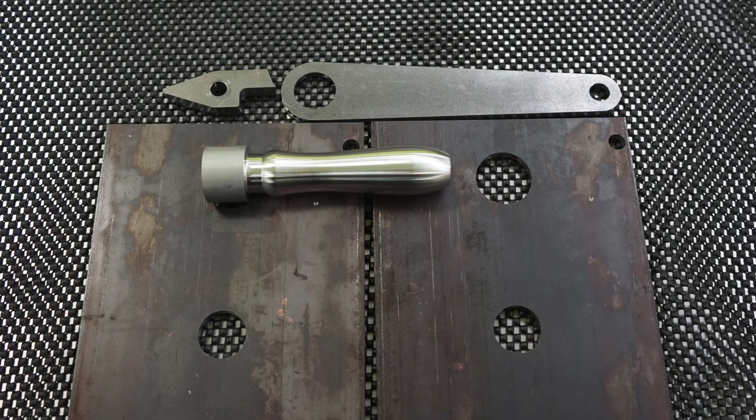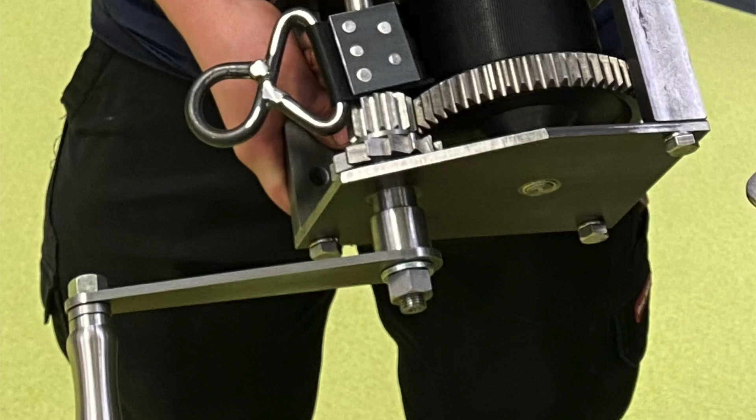So the next thing I need to do here is machine the handle, or the handle plate, I should say. Now, fixturing like this is not desirable, and I'm not telling you how to fixture your parts. This is just how I do it. Now, this is a winch. It's not calling for high tolerance parts, okay, so keep that in mind.

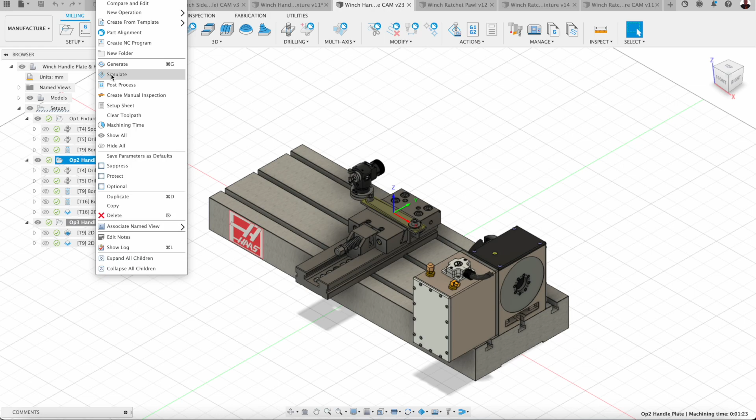So we've made a little bush down in here, and I can turn that off to show you, and that locates that, okay. We've got a fixture plate, a little bush, a couple of bolts in here. Now, if I bring it up to the CAM now to show you, if I have a look at the handle plate itself, and if I was just to simulate that and ignore the bolts, you can see here that I'm drilling that and boring that, popping over and boring that big hole.

Now, these are your critical dimensions. So in reality, the critical dimension is from this hole to that hole. However, think about what the part is. It's a handle plate for a winch. It doesn't call for high accuracy. It's not going to Mars. All right, so bolt fixturing will be fine in this instance.

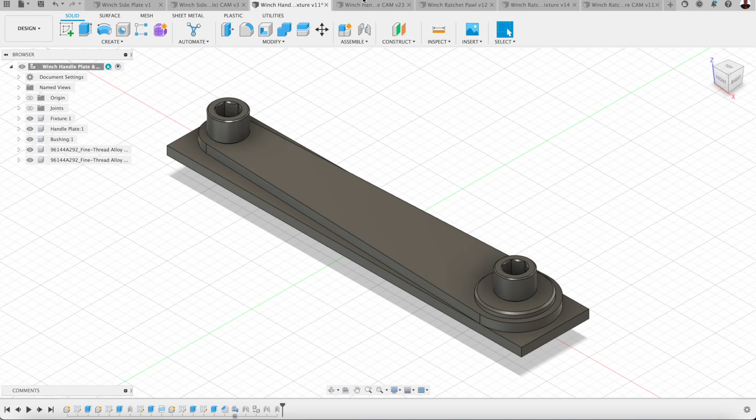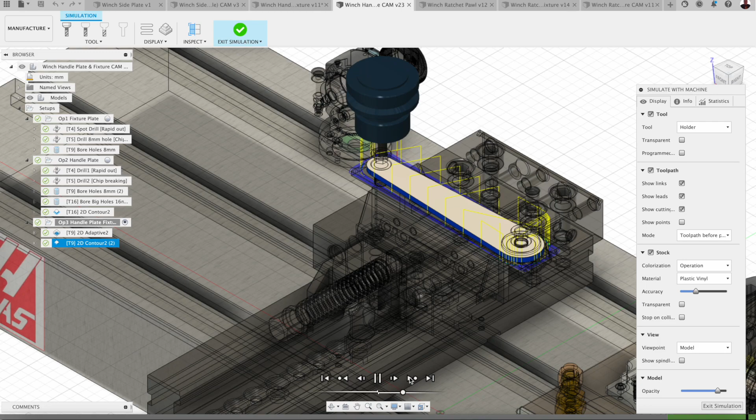Now, once I've done the plate itself, then I'll bolt it into the fixture, and I'll simulate that for you. And we're just going to do some basic 2D adaptive clearing to clean up the sides of that plate, and I'll speed that up for you, and then a 2D contour to come around and clean that up. All right, so let's go to the Haas. Let's check that out in operation right now.

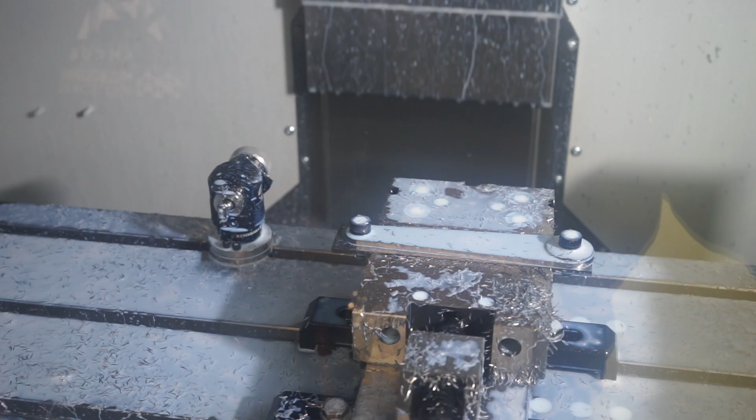Okay, so next up is this tricky little part. It's the ratchet pawl for the winch. Now, I cheated here a little bit. If I roll this back a bit here and go edit feature, actually, I'll come in here and edit the sketch. You can see that I've cheated. I took a photo of the plan and brought that into good old Fusion 360 here.

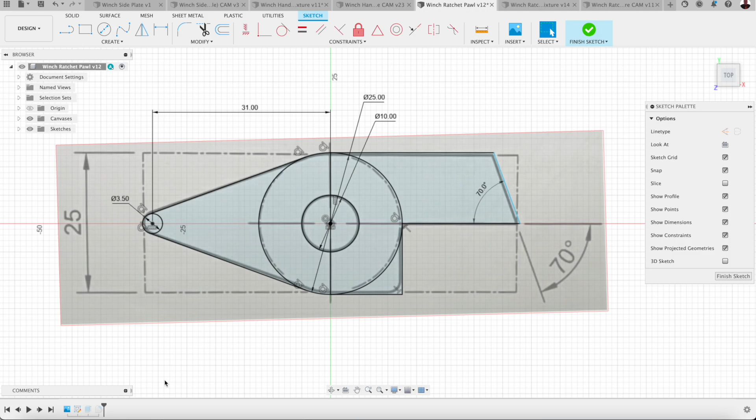And you can do that in pretty much any CAD software these days to bring an image in. I know SolidWorks does it as well. And this is how I pretty much got my measurements. So I still drew it geometrically with circles and lines and angles, that sort of stuff. Now, once I had that, I extruded my piece and put a couple of fillets in it, just in those corners to match that plate.

Once I'd finished modelling the ratchet pawl, I opened up another design and had a look, how am I going to hold this part? How am I going to fixture it? And how can I register it to get it close each time one of the students puts this into the milling machine? So a couple of third-year apprentices and myself sat down and had a really good chat about this, and we had a little bit of an offcut laying around. We came up with this dowel pin, this solid pin idea, okay?

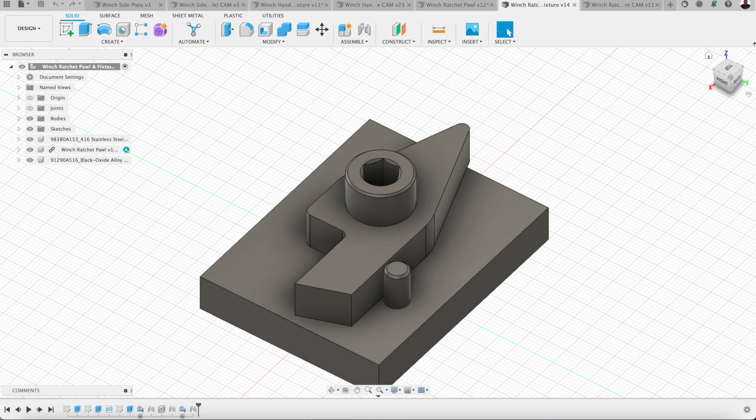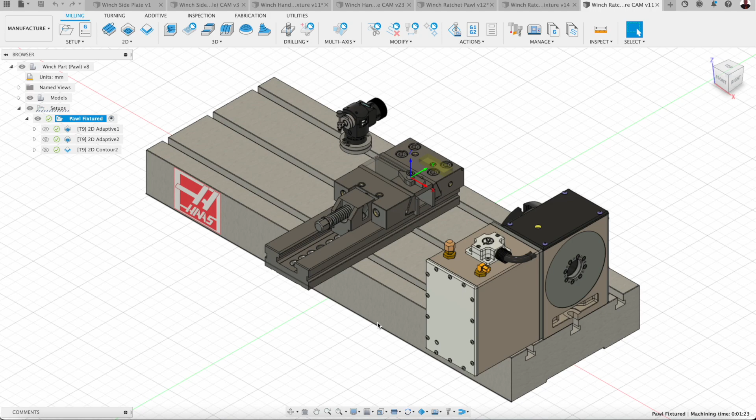So each time the bolt will hold it down, you push it up against that, and like I said, at the end of the day, would this give you a 100% accurate part? No, it wouldn't. But is it good enough for what it is? It's a ratchet pawl, all right? Like I said, it's not a jet engine turbine fan blade. So it's fine. So once we came up with that idea, we brought it into our CAM table. So this is a file that I just copy each time I want to use it.

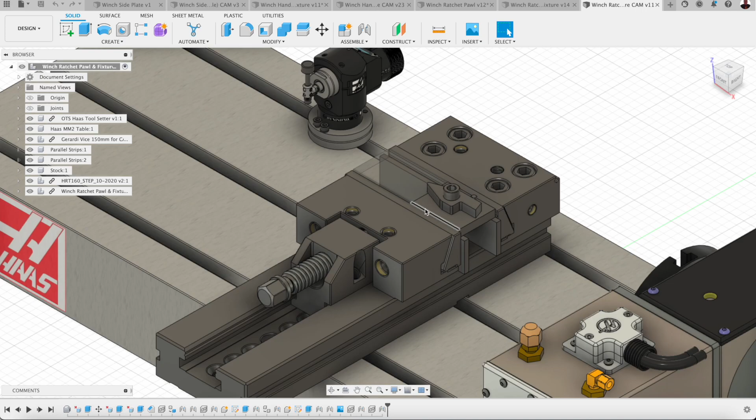If I go back to my design, you can actually see that it's parametric. If I go to parameters, I've got my parallels, my stock, everything ready to go. My stock will actually be, I've turned the opacity down so you can still see the stock there. And I bring that in with a joint and fixture it in.

Now, sadly, I forgot to click record on the camera when I machined this, so I do apologise. I will show you the finished part though. But just have a quick look at this today. We just popped in here with some 2D adaptive, just to notice here that I've just selected it in an open contour, not a closed contour.

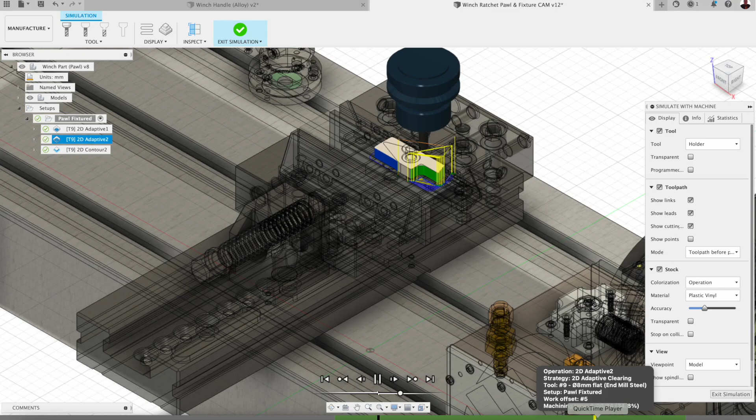So I'm just going to eat away at that little end part there, then come up to the other side and do the front section. We'll fast forward that a little bit here. Okay, and then we'll pop in, still once again an open contour, and around and exit out just before we smash into that dowel pin.

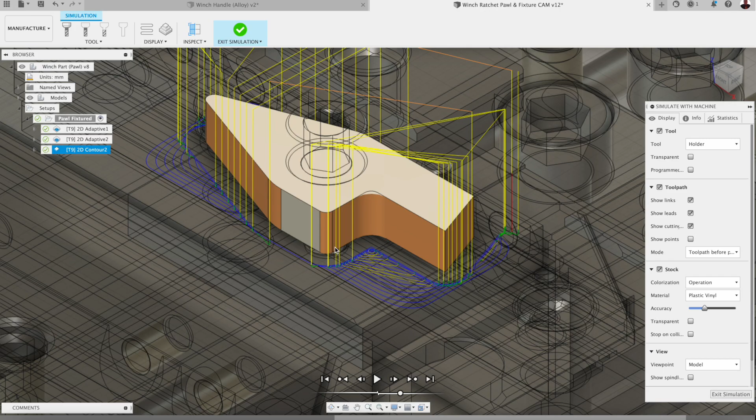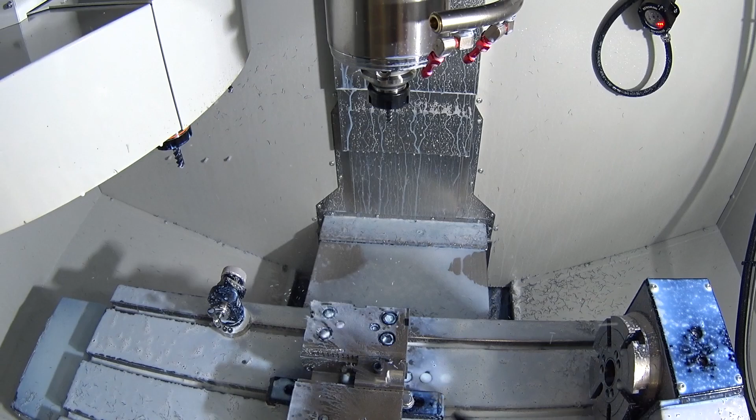Now you'll notice that the cutter radius is too big for that fillet that I put in there, but at the end of the day it's a low volume part. We're not worried about that. It's just a cosmetic feature, so we just ran with that. Alrighty, so I'll show you the machine finished here now, and we'll open the door. And the part came out very well, and we were rather happy with that.

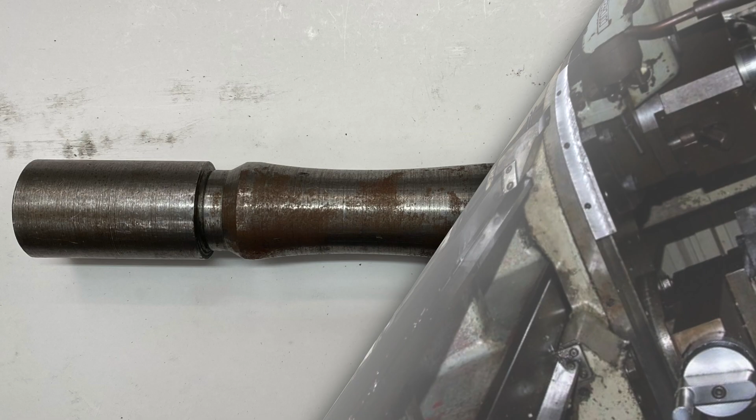Okay, next on the agenda is the handle for the winch, and we'll just take you in here to show you. Now, they actually were doing this on the old Colchester copy lathe, and that's where you put a blank in, and a stylus copies the steel blank, and a hydraulic cross slide will follow the stylus and cut the shape that you want. All right.

So, for me, what I did, I actually took a photo of that. And I'll turn my body off so you can see it. So this was their pattern that they were copying, and the stylus would track along here, and the old Colchester would make that part.

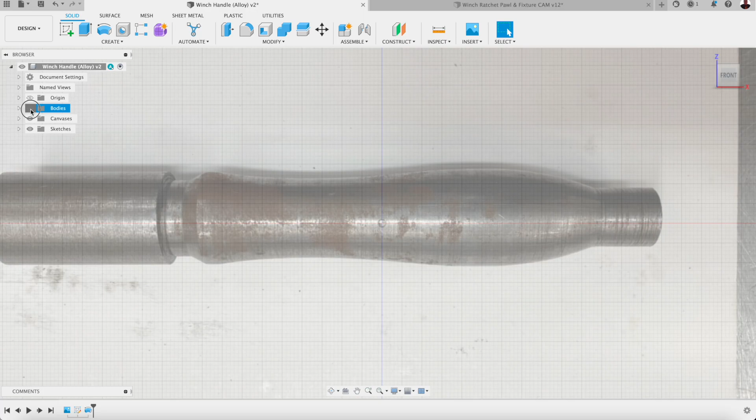So once again, just taking a photo and bringing it into Fusion, and if I take you down to the sketch here and edit sketch, you can see that I just drew the rough profile using a spline, a couple of straight lines, and then did a revolve. And once you revolve it, I had a completed part, looking like so.

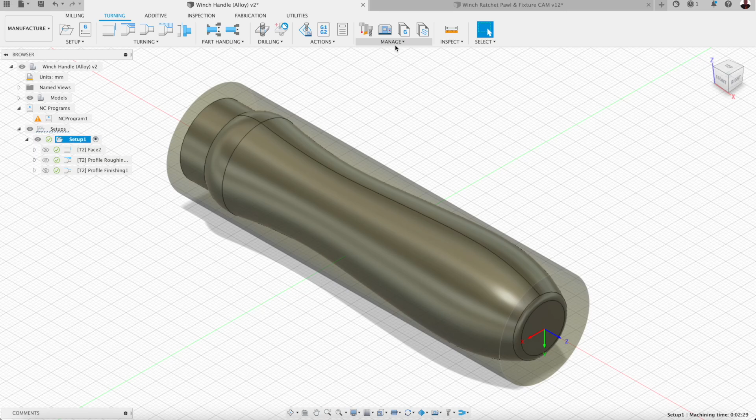Then popped over into CAM, into the manufacturing environment, and I'll just take you through here how I did it real quickly. So as we simulate that now, instead of doing tool changes, this is all in aluminium. Now keep in mind that the cutting insert I was using was not designed for aluminium. It's actually a carbide tip for steel, for hard steels.

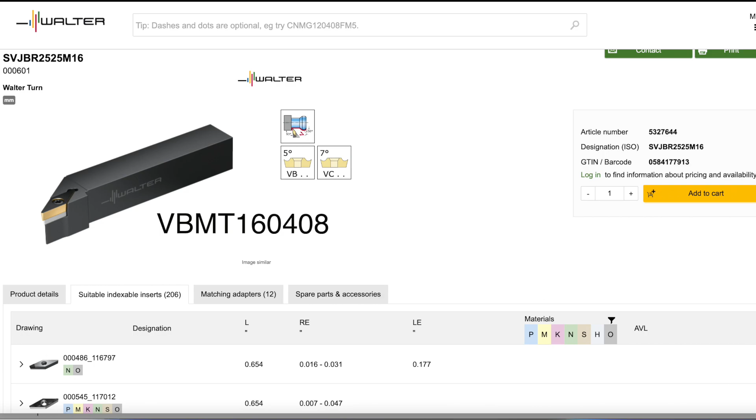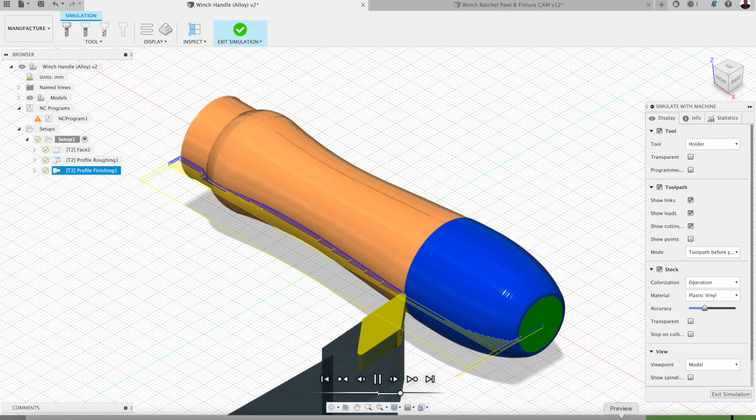We didn't have any aluminium ones on hand. But look, it worked just fine. And you can see how I've roughed it out here, and then pop back in at the end to do a finishing pass, but in reverse, okay, so I get that nice surface finish. All right, so let's pop over now and have a look in the Haas TL2 machining this out.

Okay, that does it for today. Hope you enjoyed the little two-part series that I put together making these parts, these winch parts for Matty's workshop.